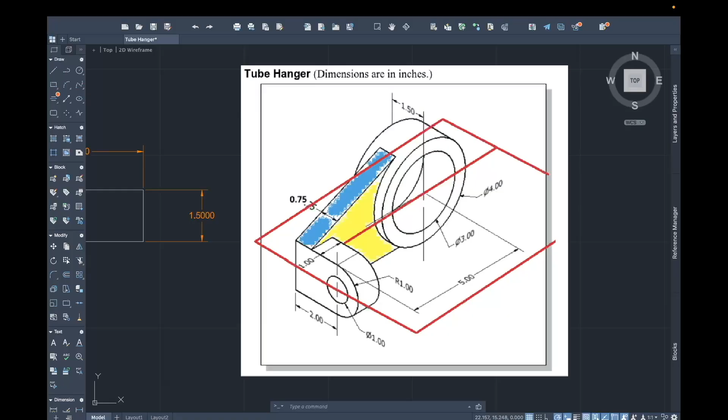Okay, so today we're going to be working on the tube hanger. This right here is the front view. This right here is the top view. And this right here would be the section view.

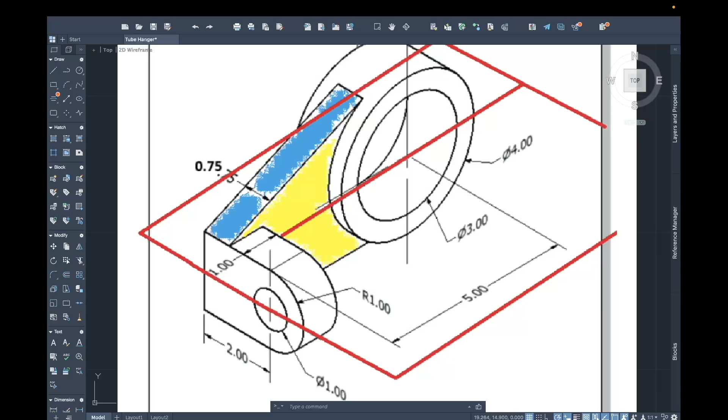Before we go into it, I want to clarify that we have this red square around our tube hanger. That's just to indicate that the center right here is on the same level as the center right here. Now, typically in the normal drawing, the center right here would be on the same level as the top left corner right here. But in the drawing we're going to be working on today, these two centers are going to be leveled.

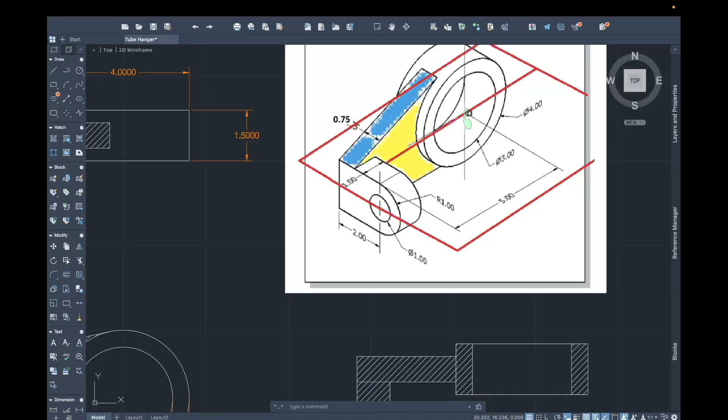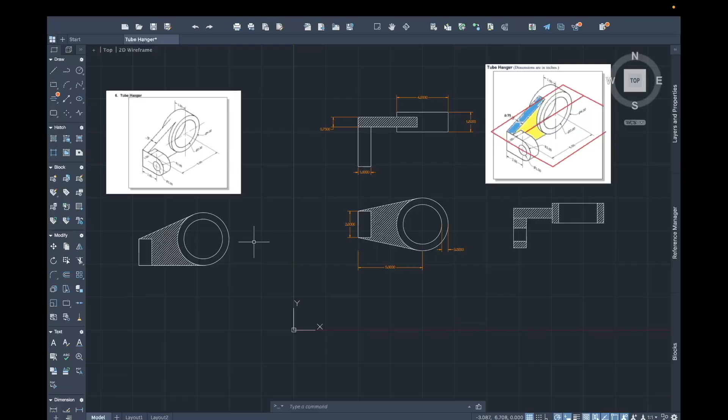I will say though that this is the front view for the original drawing, and this one is the front view for the drawing we're going to be doing today. But the top view for the drawing we're going to be doing today is, or would be, the same as the top view for this one. I can't say the same for the section view though. But if you need to do the section view for the original drawing, this video will give you a pretty good understanding of how to do the section view anyways.

Okay, so let's get started. Pick any point you want. We're going to start with the front view because it's the easiest and it makes doing a top view 100 times easier. Let's do a circle first. I'm going to pick 35, 15 because that's conveniently right over here next to our drawing. Our first circle that we're going to draw, the inner circle, or you could do outer, whatever you want, is going to have a diameter of 3. Then we're going to have another circle at the same point, with a diameter of 4.

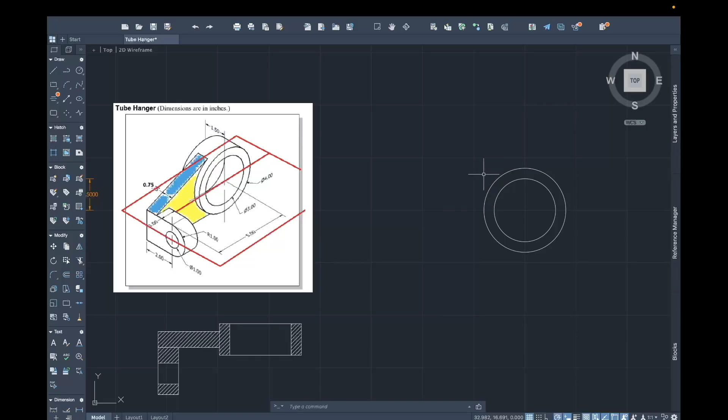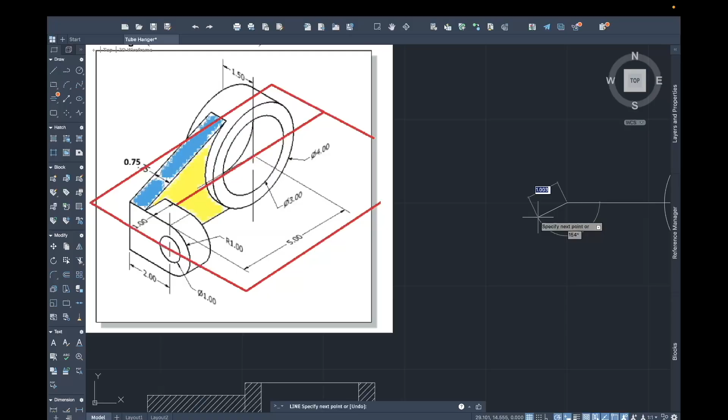So now that we have these two circles, this is what I like to do. I'm going to draw a line at the center of the circle, so 35, 15. And we can see that it goes over 5. So right here. But remember, our red square tells us that these centers are on the same level, like the same x-axis. So instead of going to the top left of this corner over here, once we go left 5, that indicates that we're at the center of this circle now.

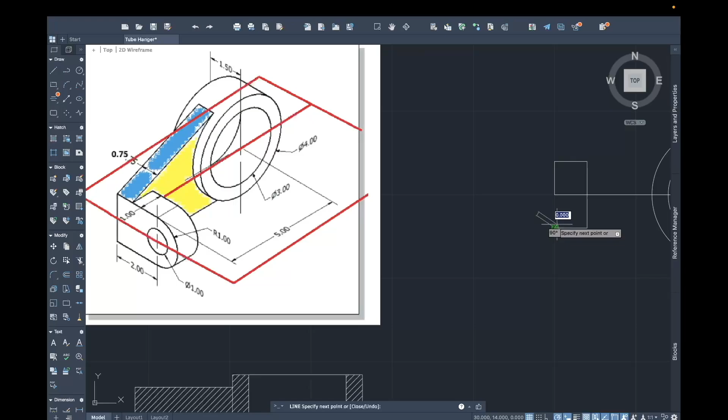So in order to draw what we would see if we were looking at it from the front, we just need to go up by our largest circle's radius, which is 1, so we go up by 1. And how wide is it? It says it's 1 wide. Then I would go 2 down, 1 across, and then back here. So now we have our little block right here, you see? If we were looking at this portion from the front, it would just look flat, like a rectangle. But we can go ahead and erase this line right here because we don't need it anymore.

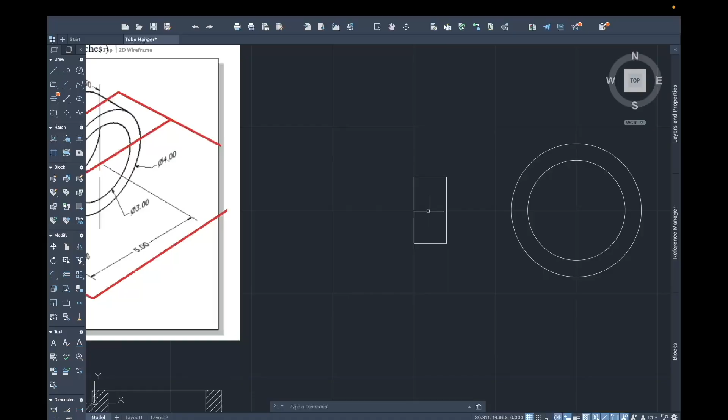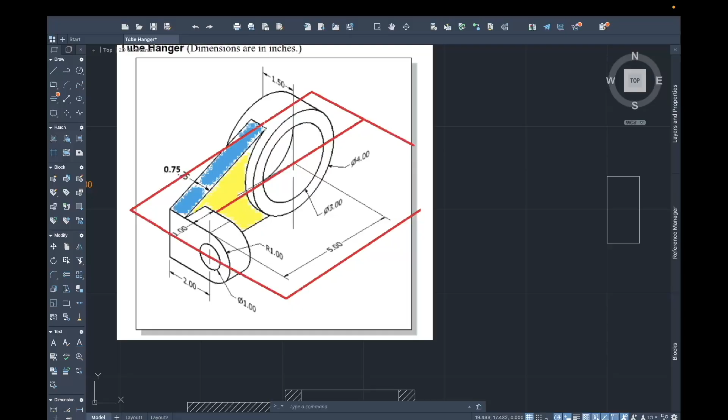And we can do the rest of our drawing. From here, if these centers are on the same level, then we know we're going to have 2 lines that are tangent to the circle, right? Because one line up here comes in contact with the circle at the top, and one line on the bottom comes in contact with the circle at the bottom. These lines, we're just going to draw them tangent.

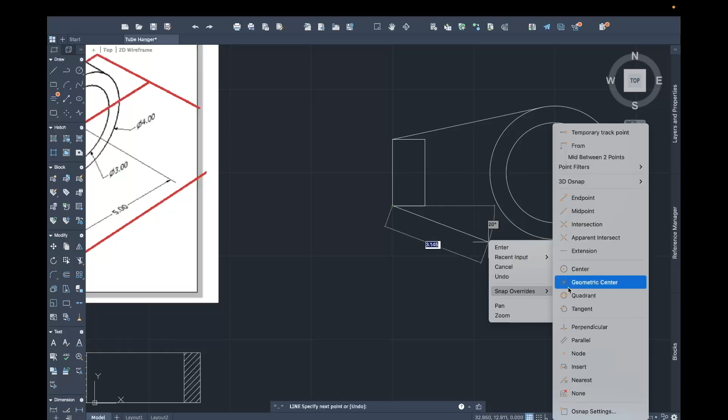So line, I'm going to do a snap override for tangent on a circle. As you can see, it snaps very nicely right there. Line, tangent, and bam, that's it.

And if you want to find the area of a certain cross section, let's say the area of this yellow section right here, you can just go ahead and hatch, then do list or area, either works. So list, select object, it tells you all the stuff right here. So 6.920 would be right here. Or you could also do area, object, or just type O. O works too. And bam, area 6.92.

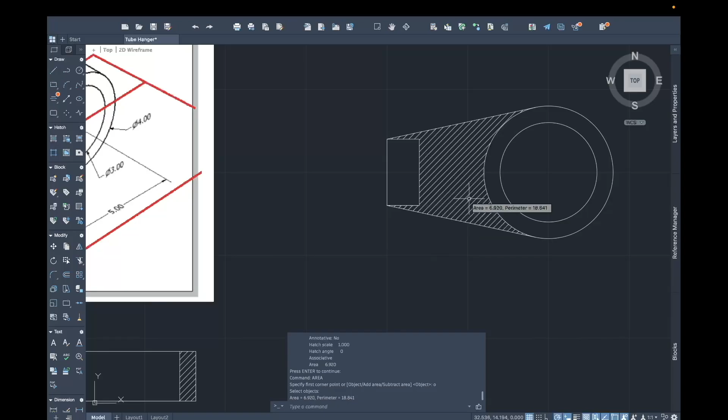So that's how you do the front view. Now let's start on our top view.

Let's draw a line and go up 7. It doesn't really matter how much you go up. You can go up by 8, 9, 10, whatever, so long as your end result doesn't collide with your front view drawing.

I want you to imagine that this front view drawing rotates towards you 90 degrees, and so you would see the top of it and how thick that circle is. The reason we're drawing our top view straight on top of our front view is that it makes proportionality really easy. So what I just said about it rotating 90 degrees towards you applies here, because the width of your circle is going to stay the same if you rotate it 90 degrees towards you, and you could use that to your advantage by seeing right here, your diameter in your front view of your outer circle.

Whether you rotate it 90 degrees forward or back towards you or away from you, it's still going to be 4. So we could use that to our advantage right here by knowing that that's 4. Or you could look right here and see that the top is going to be a diameter of 4 no matter which side you come from.

But in this case, our top view, we do need the thickness of the circle. So we see that right here, 1.5. Let's connect that right here. There you go. So we'll go ahead and trim this piece right here.

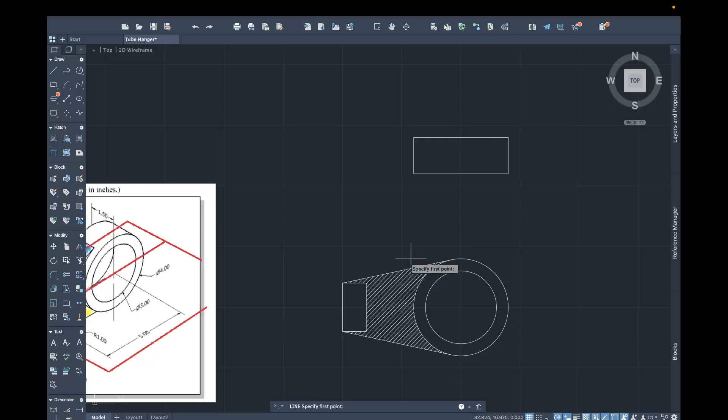Using that knowledge we just learned, we'll go ahead and do the same thing of proportionality with this line that's tangent to our outer circle. We see our intersection right here, so we'll bring that up 90 degrees. Trim this piece.

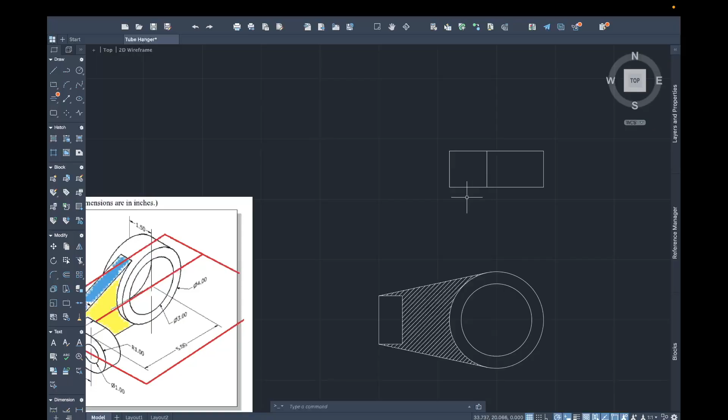So now we need to figure out what this means. This line represents where our blue portion right here ends its intersection or overlap with our circle. We know that this big rectangle outside of here is our circle, it's the top of our circle. And this is the point where this blue portion stops its intersection over our circle. That's why we drew it straight up from this line tangent to our outer circle. We need to figure out its thickness though.

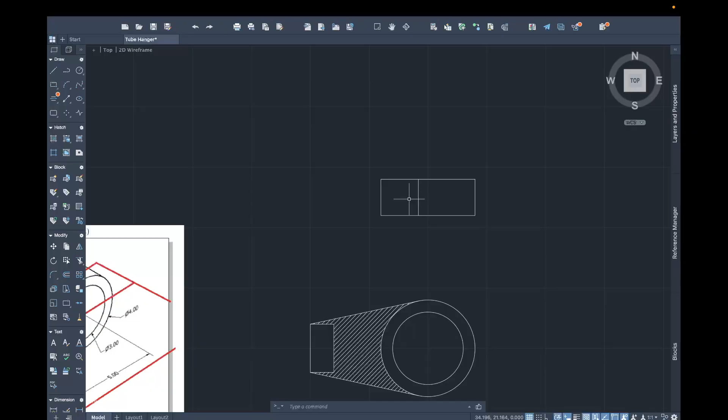Thankfully, it tells us right here, 0.75. So if its thickness is 0.75, then we need to find out how much space is on the outside of these to be able to put 0.75 inside. For that, I'll use my quick calculator. We take the thickness of the circle, 1.5, minus the thickness of the blue tube, 0.75, which gives you 0.75. But that gives you the space on both sides, so divide it by 2 to find the space on each side, which gives you 0.375.

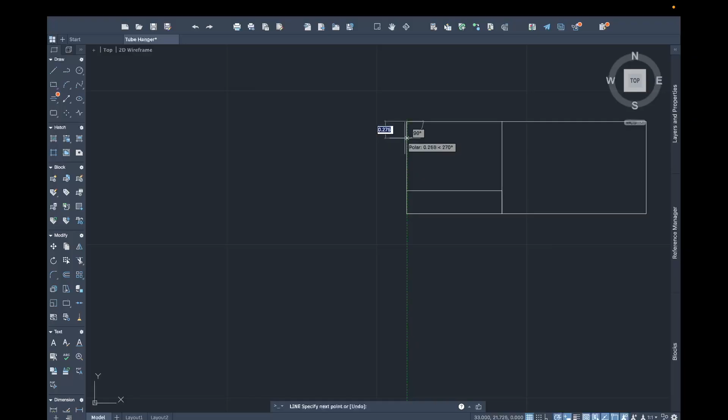So I know that for this one, I'm going to need to go up 0.375, and then we'll just put the line right here for now. We'll fix it later, or extend it, or whatever we need to do with it. 0.375, and then put that over here. Okay.

So let's trim out our lines that overlap, and then trim out anything unnecessary. So that'd be this part, this part, this part. Awesome.

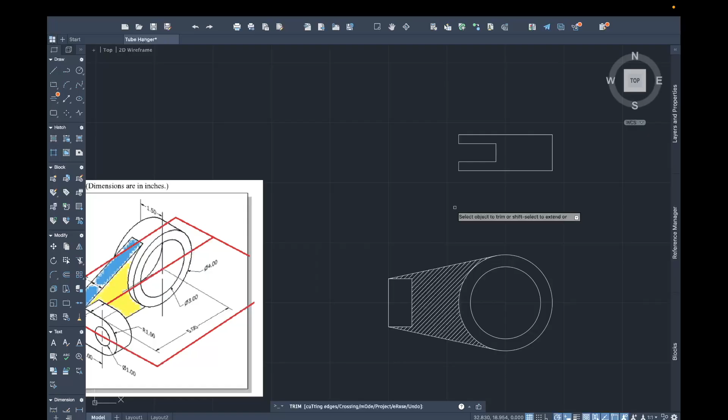So now we found out the blue portion that overlaps with the circle. But now we need to find out the blue portion that is outside of the overlapping of the circle. And the way you do that is just by analyzing the photo.

We see that from the center of this circle to the center and edge of this drawing, it is the distance 5. So all we have to do is find the radius, which is the distance from your center to the outside of the circle, and then subtract it from this number, because this number brings us all the way to the edge. If we subtract the radius, then we're excluding the distance of the circle, which just gives us this portion, the blue portion, all the way to the edge of the drawing. And that's exactly what we're looking for.

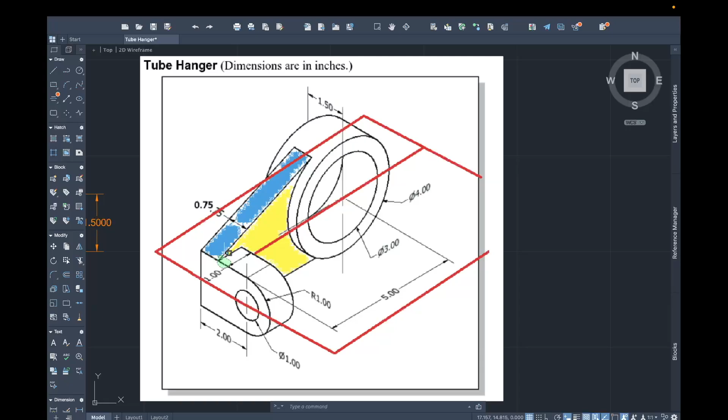So the radius of our big circle is 2, because the diameter is 4. So the distance would be 5 minus 2, which is 3. So we know that the rest of our blue portion is going to be 3 away from the beginning of its intersection with the circle.

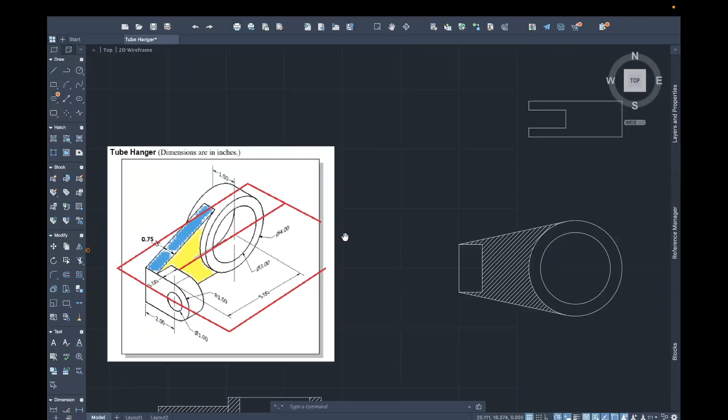So let's do a line, put it by 3. Its thickness is 0.75. And then 3 again. You'll see it fits nicely right there. And boom.

Now the last part would be this little portion right here. So we need to find out how long it is, and we need to take into account this 0.75 as well. This 0.75 has already taken up a portion of this length right here in our top view. So we need to find the total length and subtract it by 0.75 to only find this portion.

So the total, we could already see, we have 2 right here to the center of the circle. And as long as we find the center of this big circle, we can know the total length from the back of here to the front of here. So 2, and then the radius of the big circle is 1. So we have a total length from here to here of 3. Let's put it in the calculator. 3 minus 0.75, which is 2.25.

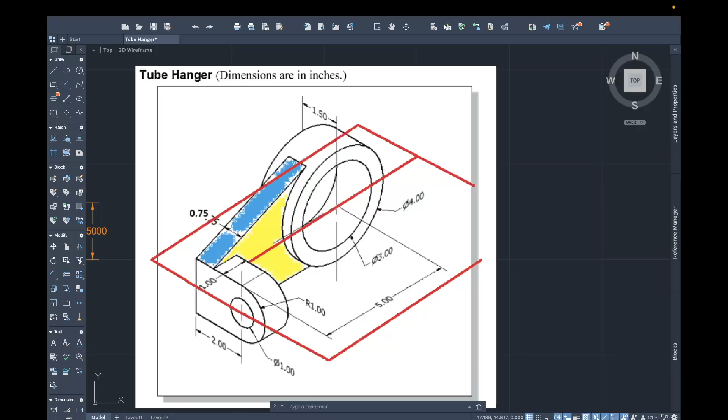So we know that outside of this blue rectangle, we're going to have 2.25 attached to it. So line 2.25. Do we know how thick it is? Yes, it gives us the thickness as 1. So 1 across. Oh, whoops, I did that wrong. Let's see.

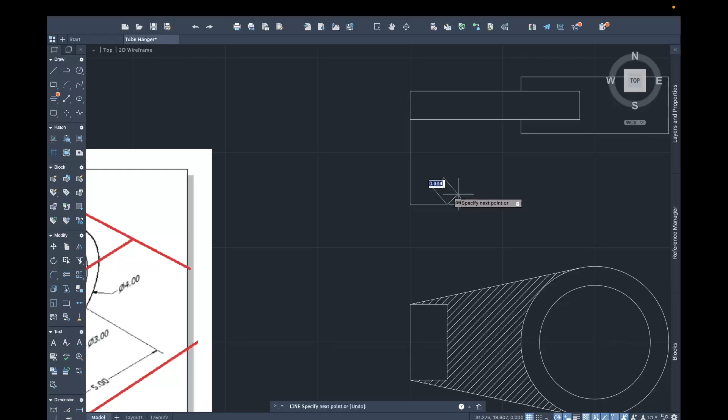There you go. Then connect it. And there you go. That should give you your top portion.

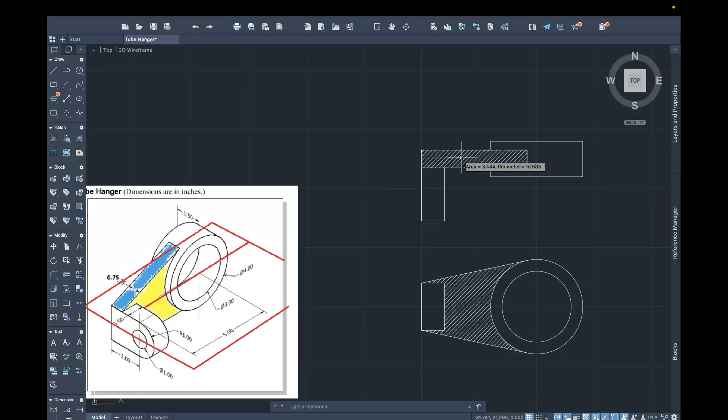For your top view, you can shade it in with hatch or whatever you want to find the area. If you wanted to find the area of it, just do the same thing that we did last time. You can go in and put hatch, click it, area, object, bam, 3.444.

And that's pretty much it for the top view. Finally, we have section view. Section view is a little more difficult, a little more complex, with more steps to it. You have to think it out a little more carefully.

So I want you to imagine that we're looking at this drawing, and we have a cutting tool, let's say a knife, and we cut this drawing straight in half horizontally, like so, like in half. Well, you get the gist.

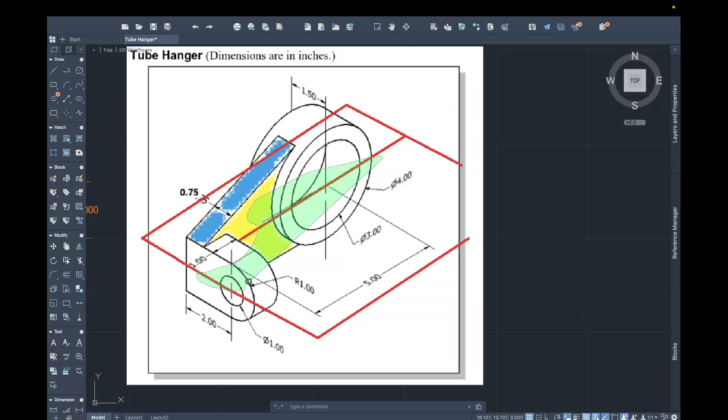Any side or any portion that touches my knife when I'm cutting this object horizontally is going to be drawn in our section view. So for example, we know that the distance from our first radius, which would be 1.5, our inner circle, to our second radius, which would be 2 for our outer circle, is 0.5.

So when that's this length right here, our knife touches this area, so it's going to be drawn. And it's going to have a length of 0.5 because that's the difference of our radii.

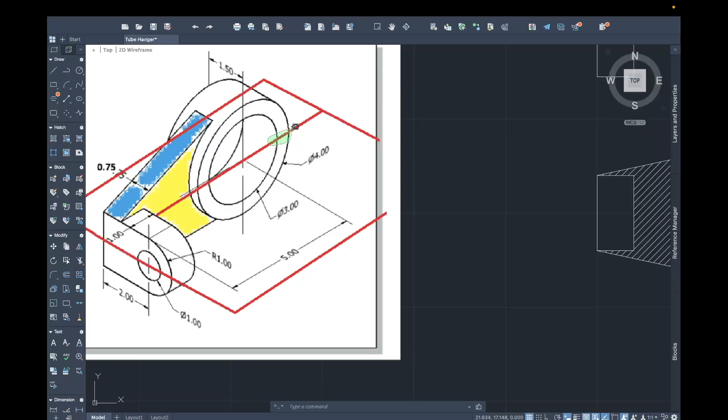And that can be seen right here with our section view drawing. If we measure it, 1.5 by 0.5. The reason why it's 1.5 is because of the width of the circle, and then it's 0.5 because that's the difference of the radii.

So the knife touches the outside part, so you have to draw that part. That's why this is shaded in with hatch. But the knife, when it goes through the circle, it's cutting it perfectly in half. It does not touch the inside of the circle though. That's why this part is not covered in hatch.

Although when it reaches the other side of the circle, you do have to draw the same thing as you did on the right side. It has the same dimensions.

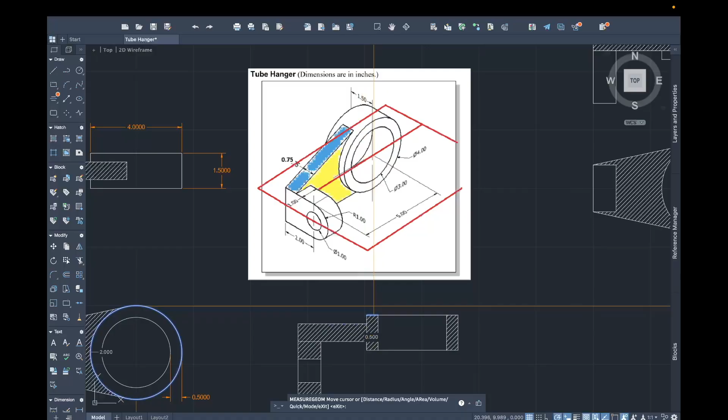And then the knife reaches the outside of the circle into this slanted area. But it doesn't matter if it's slanted because it's getting cut in half. And also this overlap right here doesn't matter because it only matters what the knife touches, and the knife is not touching the overlap, it is touching the middle of this.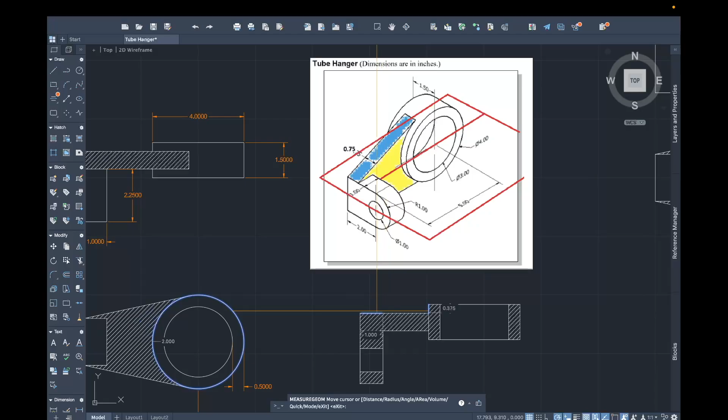So we're only including the distance from the outside of our circle to our edge, which we already have from our top view. If I remember correctly, that added up to 3, which makes sense because we have a length of 2 right here and then a length of 1 right here. And we include those, so we hatch those because the knife actually touches those portions.

And then it moves on to the final piece to cut in half, which it touches all along right here, but it does not touch this inner circle, which is why there's no hatch right here. And then it comes out here, which is why there's a little hatch right here.

So the dimensions would be like this, 0.75 thick, and then it would be 3 across because we have our 5 right here. Remember, our 5 from the center of this circle to the edge over here. We exclude that by subtracting it from the largest circle's radius, which is 2. So 5 minus 2 is 3.

That brings us right here. So the distance from here to the edge would be 3. And that's exactly the path we cut along.

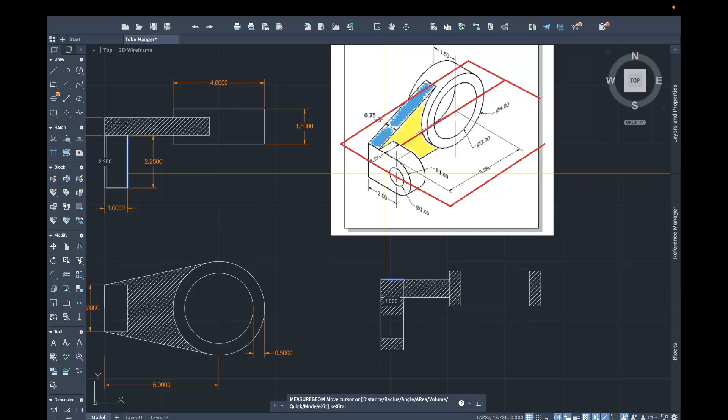And then 3 minus 0.75, let's do it in the calculator, would be 2.25. So from here to the edge over here would be 2.25, which adds up.

And then you want to exclude this portion, the circle, which is pretty easy. It makes it easy for us because it has a diameter of 1.

And once you do that, you're able to solve for this part right here. We know it has a width of 1, and then we know it has a length of 0.75, because if you do 3 minus 0.75, that gives you the 2.25, which gives you this distance outside of the blue slant to the edge over here.

And then you subtract that to get the distance in between them. And the radius of the small circle, as we said earlier, was 0.5 because the diameter is 1. And then that would give you 0.75.

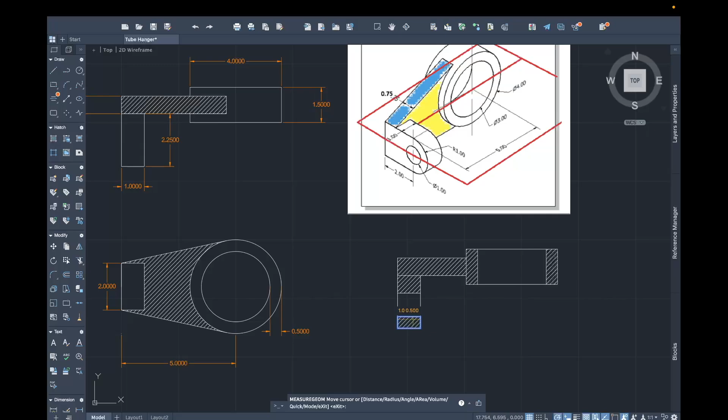And then lastly, the outer portion right here, which we have 0.5 and 1, the thickness being 1 and 0.5 being the length. And we know that because, very simply, the difference of radii right here, the inner radius and the outer radius is going to be a difference of 0.5. So the outer radius is 1, inner radius is 0.5. 1 minus 0.5 gives us 0.5. And then we have the thickness is 1, so 0.5 and 1. And that's how you do the section view portion.